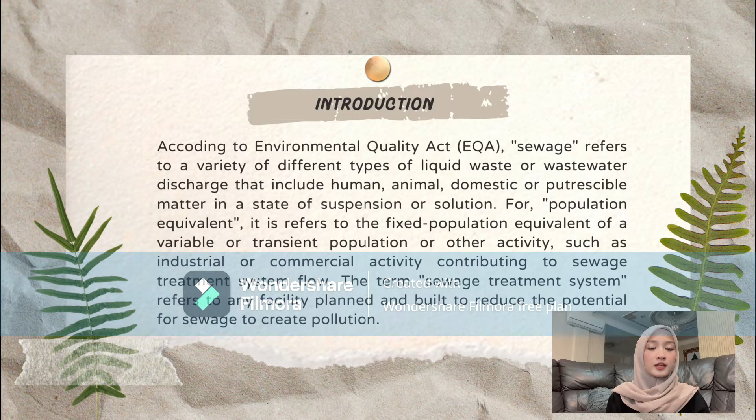The term sewage treatment system refers to any facility planned and built to reduce the potential for sewage to create pollution. In this project, a sewage treatment plant (STP) had to be built in the current development area. All 5 members of the team are required to participate in this project. This Environmental Impact Assessment (EIA) report will refer to the project proposed design throughout the course of this report.

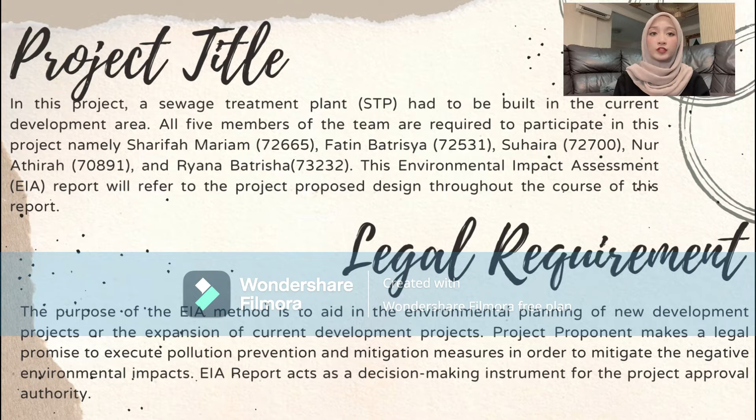In Malaysia, the purpose of the EIA method is to aid in the environmental planning of new development projects or the expansion of current development projects.

Desa Ilmu, Kota Samarahan, located in Sarawak, was selected as the site of our project after careful consideration. Desa Ilmu in Kota Samarahan, formerly known as Muara Tuang, is a town and the administrative center of the Samarahan district in Sarawak's Samarahan division. A proposal to build a sewage treatment plant was made on the property that was unused.

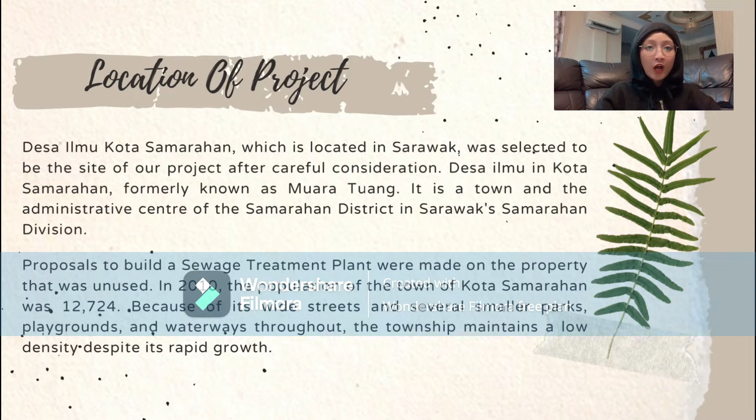In 2010, the population of the town of Kota Samarahan was 12,724. Now, the population equivalent at Desa Ilmu Kota Samarahan is 17,398. Because of its wide streets and several smaller parks, playgrounds, and waterways throughout, the township maintained a low density despite its rapid growth.

Due to the fast growth and increase in population, economic opportunities, and the needs for residential, commercial, and industrial properties, the demand for these properties has gone up.

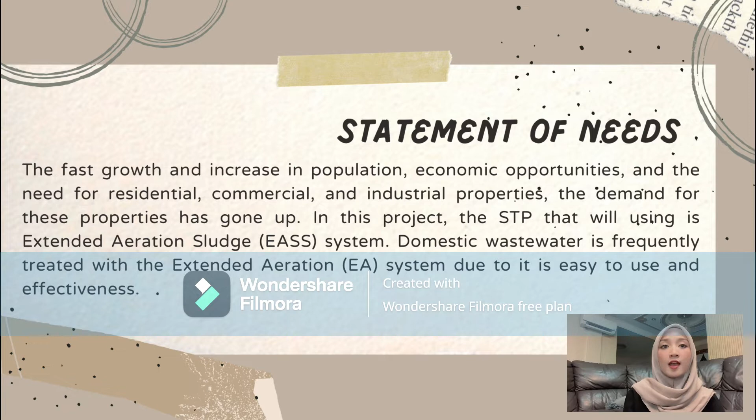In this project, the STP that we're using is the Extended Aeration Activated Sludge System. Domestic wastewater is frequently treated with the Extended Aeration System due to its ease of use and effectiveness. In planning for new wastewater treatment plants, consideration must be given not only to the physical facilities required to produce a high-quality effluent, but also to opportunities to minimize operating costs associated with labor, energy, and byproduct stabilization and disposal.

The project location was selected for the sewage treatment plant that is compatible and suitable for 17,398 PE from the entire development area. The project site is part of an ongoing mixed-use development that will eventually include residential, commercial, and public amenities.

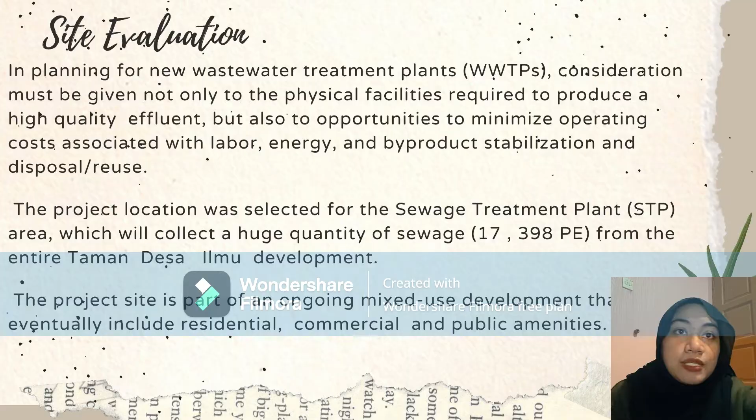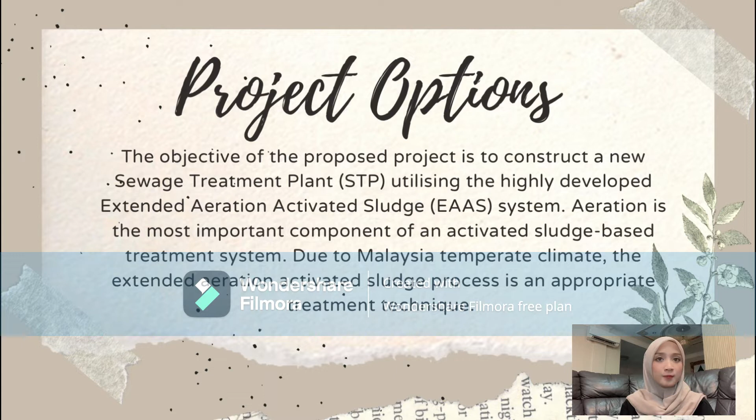The objective of the proposed project is to construct a new sewage treatment plant (STP) utilizing the highly developed Extended Aeration Activated Sludge System level. Due to Malaysia's temperate climate, the Extended Aeration Activated Sludge process is an appropriate treatment technique.

The project site is located near Kampung Meranek, Daerah Samarahan, Sarawak. It was proposed to be constructed on empty land, far from the existing development area. The proposed project site is strategically located approximately 2 km from Taman Desa Ilmu. The existing route located close to the project site is Jalan Meranik.

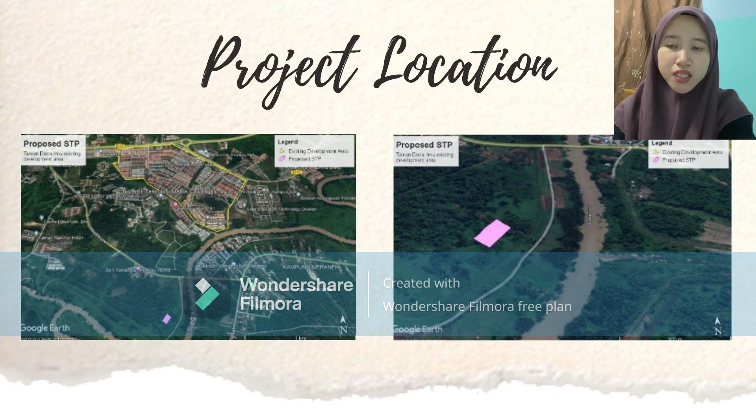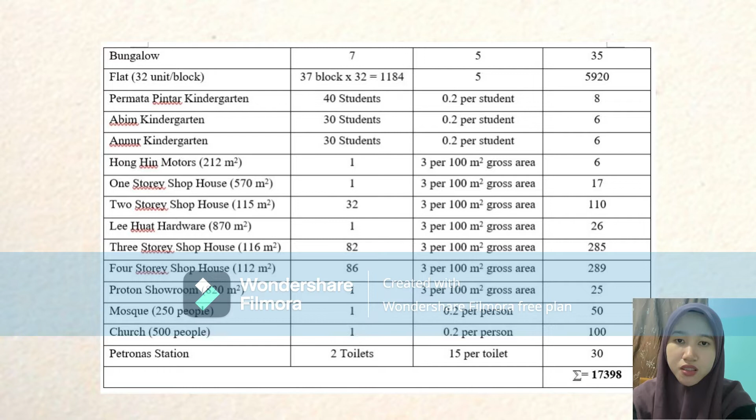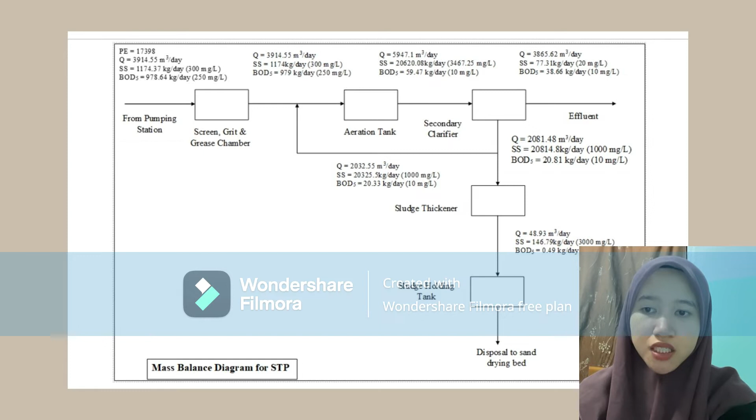Next is the mass balance for the sewage treatment plant. It is important to check the hydraulic retention time, volumetric loading, and recycle ratio before doing the calculation for quantity and volume of sludge wasted per day.

The proposed STP will be developed for residential and commercial development. The total PE for the proposed STP is 17,398, and it will be constructed at the stranded land near the river, which is Sungai Tuang.

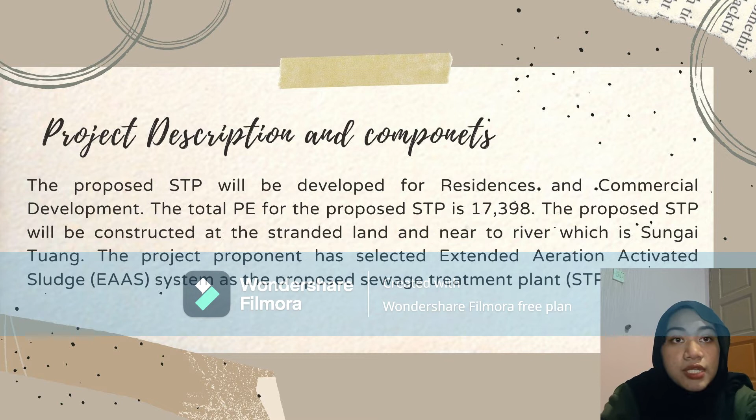The proposed sewage treatment plant will be using the Extended Aeration Activated Sludge (EAAS) system, and the process is very similar to the conventional activated sludge process. Here is the summary of the process description.

At the screen chamber, all rags, wood, and debris will be filtered from the influent to prevent them from flowing into the plant, protecting the equipment. Then, the grit and grease chamber is purposed to separate grit and grease, or discrete particles that have subsiding velocities or specific gravities significantly higher than those of organic solids.

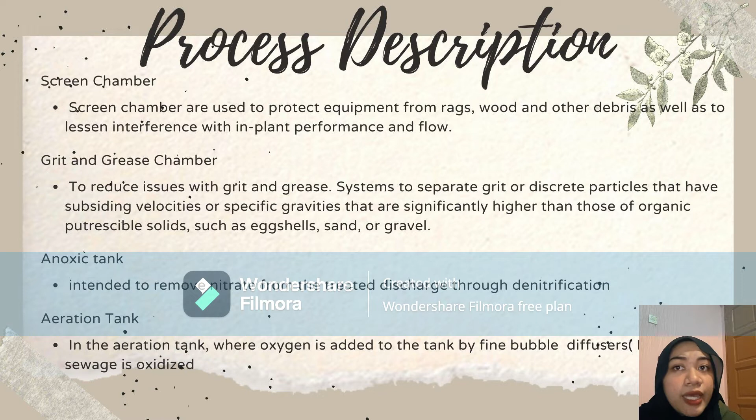Moving on to the anoxic tank, anoxic tanks are intended to remove nitrate from the treated discharge through denitrification. The aeration tank is where the sewage is oxidized when oxygen is added to the tank by fine bubble diffusers. A large concentration of microorganisms can be found in the effluent from biological activities. The combined liquid, organism, and solid can settle using secondary clarifiers that are provided after the biological system.

Sludge thickener tanks are used for the thickening process, where it raises the sludge solid concentration by removing some of the liquid component. Lastly, sludge dewatering is a process to reduce the water content of the treated or thickened sludge produced by the sludge holding and sludge thickening processes, by performing sludge dewatering.

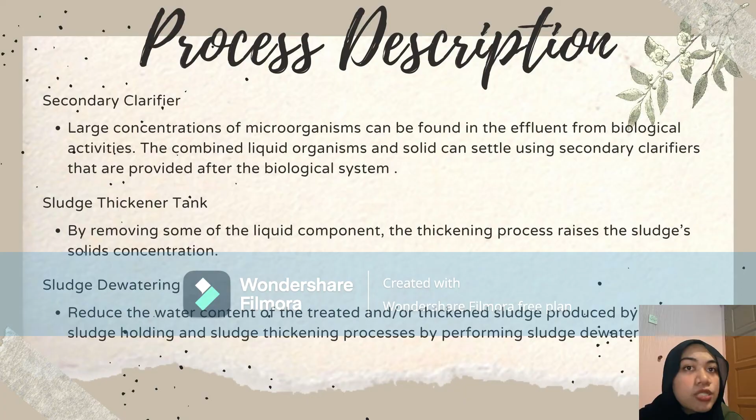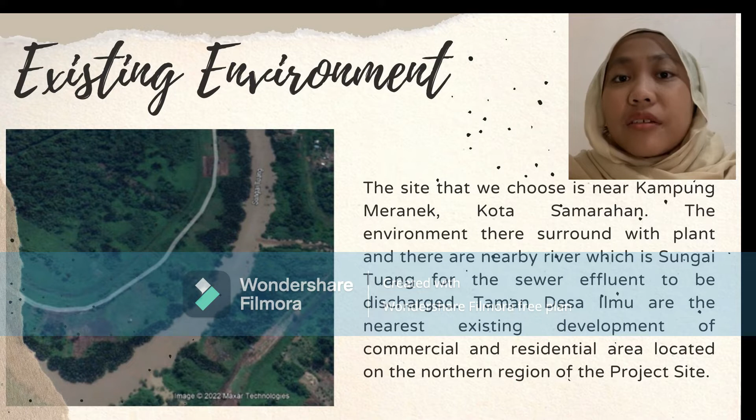I am Nakira. We will discuss the existing environment. The site that we chose is near Kampung Meranek, Kota Samarahan. The environment there is surrounded with plants, and there is a nearby river, Sungai Tuang, for the sewer effluent to be discharged. Taman Desa Ilmu is the nearest existing development of commercial and residential area, located at the northern region of the project site.

Next, I will discuss water quality and ambient air. It is important to figure out the level of pollution and cleanliness of the water. It is measured using the Water Quality Index (WQI) to know the class of the river. Generally, throughout the river, the standard of water under the National Water Quality Standard for Malaysia is classified as Class 2.

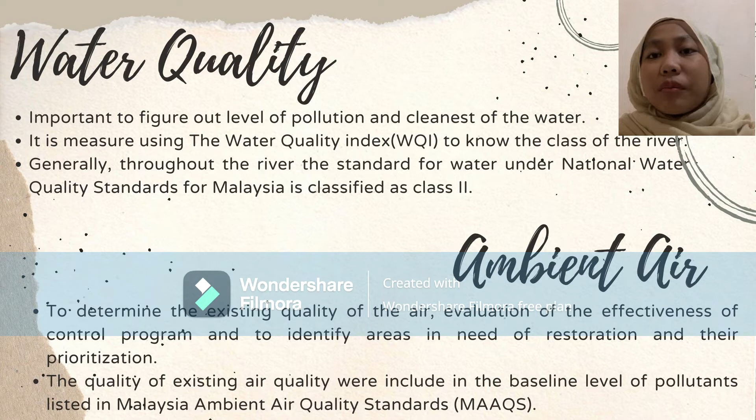For ambient air, it is used to determine the existing quality of the air, evaluate the effectiveness of control programs, and identify areas in need of restoration and their prioritization. The quality of existing air will include baseline levels of pollutants listed in the Malaysia Ambient Air Quality Standard (MAAQS).

Next, I will explain about odor and noise level. Odorous compound generated by the sewage treatment process consists primarily of hydrogen sulfide (H2S). At high concentration, H2S can make workers tired, give them headache, irritate their eyes, and cause other problems.

For noise level, existing environment is also significant to be collected during the baseline data study. There are recommended permissible sound levels by receiving land use for new development.

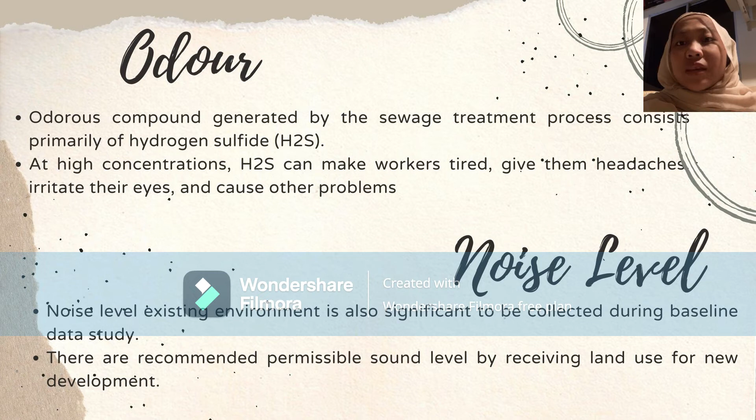Lastly, I will discuss about economic activities and infrastructure and utilities. The economic status of the project site is determined through site observation. To sum it up, the household attitude toward this project will ensure information for policymakers to improve the treatment plant efficiency.

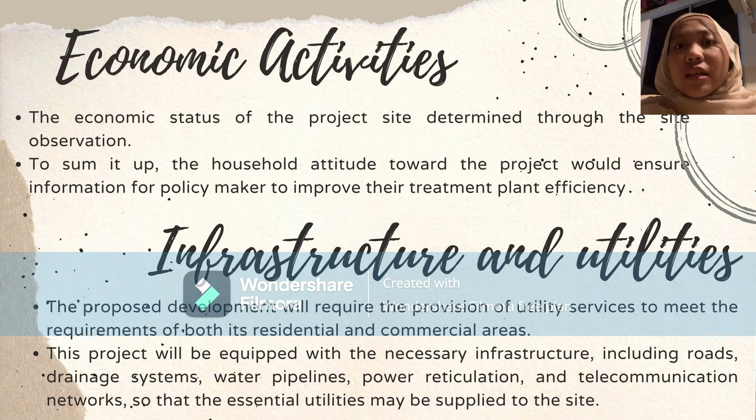The proposed development will require the provision of utility service to meet the requirements of both its residential and commercial areas. This project will be equipped with the necessary infrastructure including roads, drainage system, water pipeline, power reticulation, and telecommunication networks, so the essential utilities may be supplied to the site.

I will discuss about environmental impact. In order to conduct the assessment of environmental impact of the project, each component of the project must first be analyzed in respect to the environmental characteristics of the project region.

For soil erosion and sedimentation, soil erosion is expected throughout the STP construction phase. Soil erosion and sedimentation at construction sites generate water quality and siltation issues in receiving water bodies and river systems. For water quality during the project's building phase, proper mitigation measures must be taken to reduce and mitigate its effect.

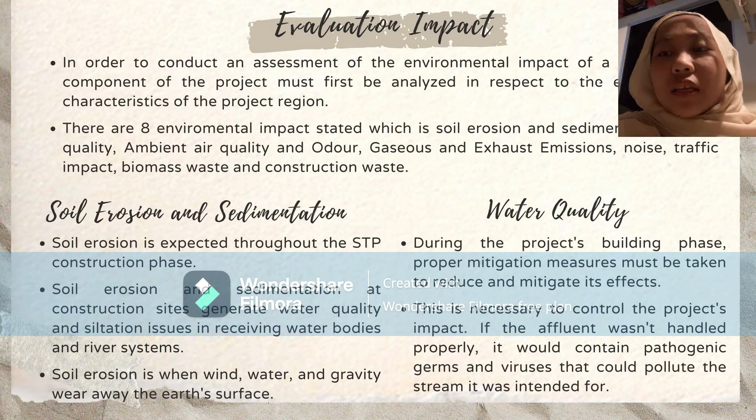Next, I will discuss about ambient air quality and odor. Site preparation, construction, and non-routine events might alter air quality. Due to improved air quality, machine and vehicle emissions have been decreased. For gases and exhaust emissions, during construction, emission from site machinery equipment may temporarily lower air quality.

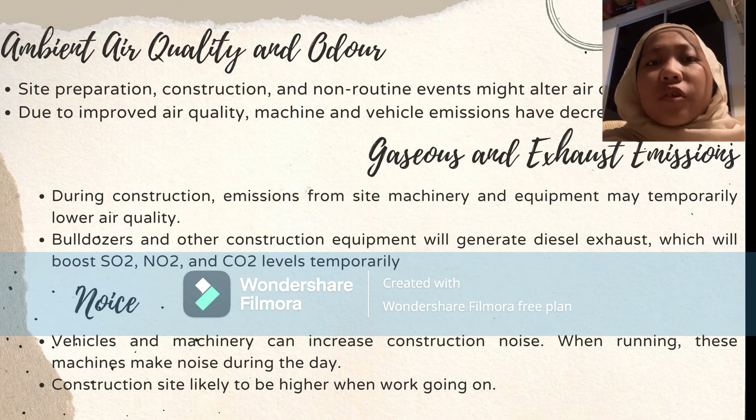For noise, vehicles and machinery can increase construction noise. When running, this machine makes noise during the day. For traffic impact, the project construction and completion will boost nearby car traffic. Construction vehicles may cause brief disruption.

For biomass waste, the site has been cleaned and platform prepared for STP construction. Thus, no biomass is expected. Construction waste is mostly inorganic. Excess steel, rods, plastic, and concrete are examples. Those items cannot be reused and must be disposed of off-site or buried on the project site.

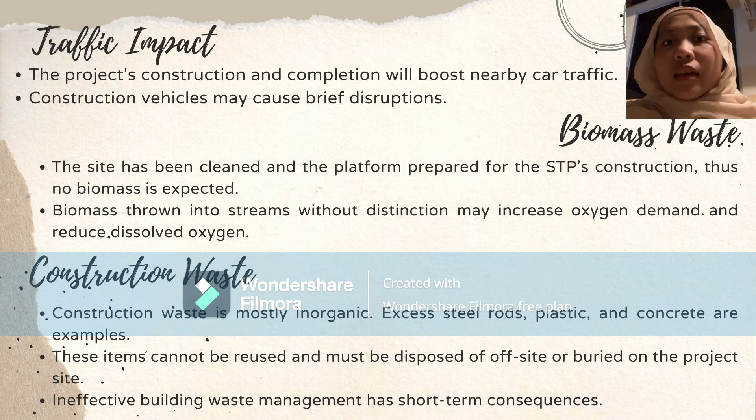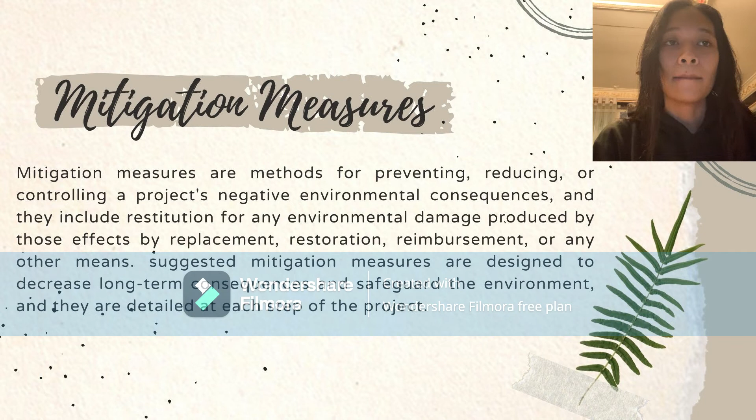Mitigation measures are methods for preventing, reducing, or controlling a project's negative environmental consequences, and they include restitution for any environmental damage produced by those effects by replacement, restoration, reimbursement, or any other means.

In the pre-construction phase, for the discipline of soil corrosion, the environmental impact that it will give is soil erosion and sedimentation. Measures that should be taken for this impact is to avoid conducting soil investigation and site survey during rainy or wet season.

Secondly is water pollution. The impact that it will give is deterioration in water quality. The measures that should be taken include construction of check dams, silt traps, or sediment basins, and providing proper toilet facilities for construction workers in compliance with the National Water Services.

For odor and air disciplines, the impact that it will give is dust emission and worsening of air quality. In order to combat this, canvas can be used to cover vehicles hauling soil or other goods. Other than that, organize and cover construction raw materials, including sand, gravel, and cement, in a safe and orderly manner. The third discipline is noise pollution.

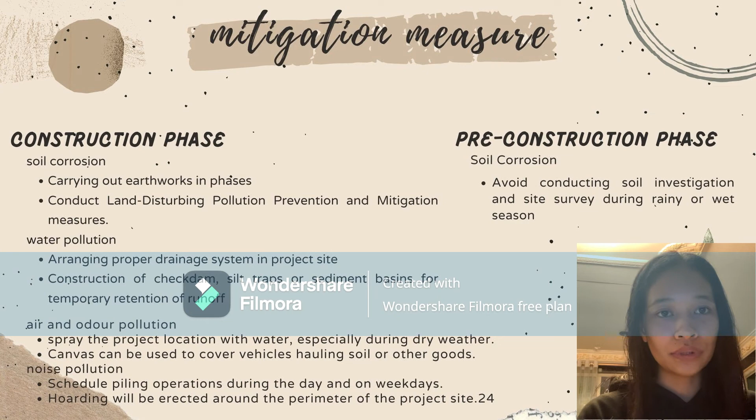For operation and maintenance of the sewage treatment plant, it will give air and odor pollution. The impact that it will give is toxic gas contamination and fire hazard, and also odor generation. The measures that should be taken is to create a set of standard operating procedures for the team, and secondly, plant layout and buffer zone should be taken into account, with trees being planted all around the STP site.

To minimize unpleasant odors, all gaps in the machine and equipment must be completely covered, and to ensure that a huge amount of sludge is not held for an extended length of time in the STP.

Operating STP also gives out noise pollution coming from the operating equipment and machine. So the measures that should be taken is equipment and machinery should be serviced and maintained on a regular basis, and installation of a high wall fence to serve as a buffer around the STP.

And lastly is water pollution. Water pollution will deteriorate water and groundwater quality. The measure that should be taken is to maintain and improve the STP functioning by conducting frequent effluent testing as per regulatory requirement.

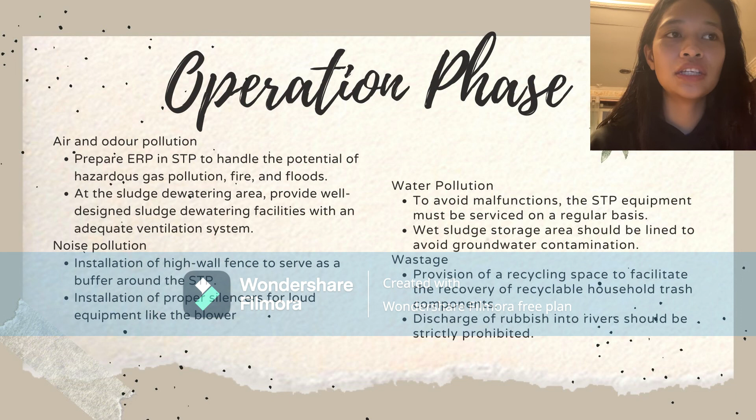And for wastage, the impact that it will give is domestic and solid waste generation. So the measures that should be taken is provision of recycling space to facilitate the recovery of recyclable household trash components, and discharge of rubbish into rivers should be strictly prohibited.

The location chosen for the STP is for the Taman Desa Ilmu, Kota Samarahan. The STP, however, is located near Kampung Merantau, where the location is empty and far from existing development. The population equivalent adds up to 17,398. So an STP to provide for roughly 20,000 PE is needed.

Extended aeration activated sludge (EAAS) is chosen as it is similar to the conventional activated sludge process. At the location chosen, it is near River Tuam. However, it is not very favorable as it is in the upstream, and the discharge water may cause pollution toward the development area, which is Kota Samarahan.